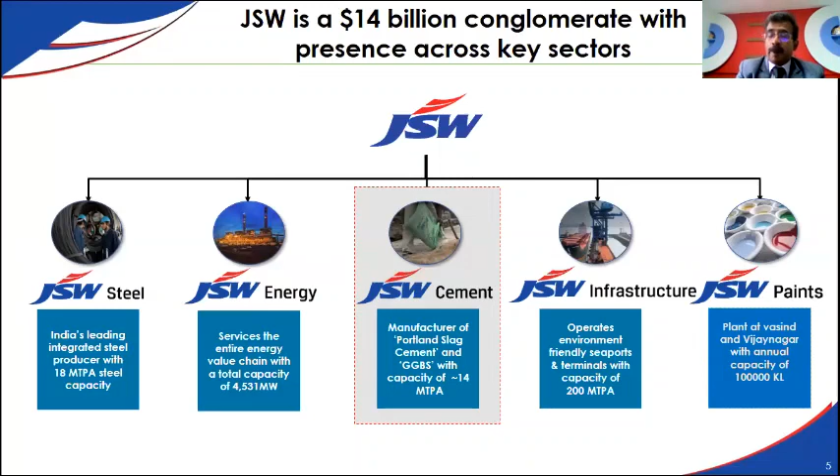So the journey started way back, but officially the company started in 2009, and we have already grown up to 14 million tons, one of the fastest growing cement companies in India. Every year there are expansions and additions. By 2022, they want to become 20 million tons. After that, the next 30 million tons is also under plan. And recently we started our paints division, and it's doing extremely well.

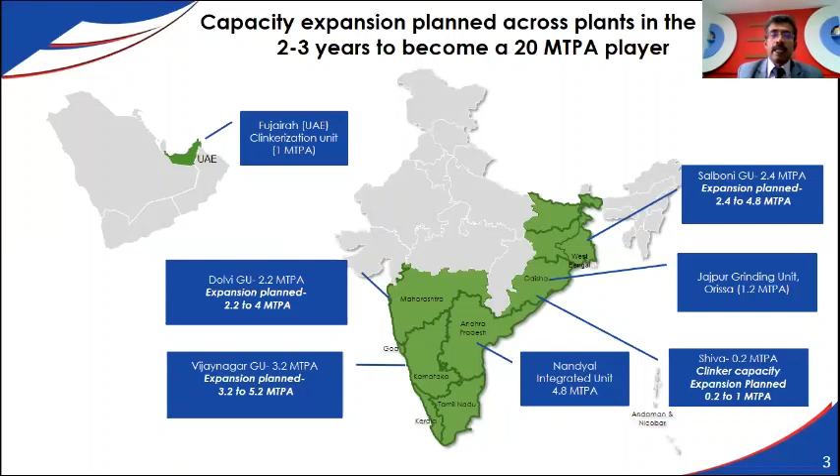This is our presence in various parts of India, and very soon we'll be launching our operations plants in Rajasthan also, that is also in the pipeline. So with that, we'll become a pan-India player. Apart from India, we are also in Fujairah, a clinkerization unit manufacturing clinker of 1 million tons. So various products we have, all are green products, except one, OPC cement, where we want to cater to the infrastructure segment.

Wherever our products like GGBS are going, in order to supplement the customer requirement, because they demand you should give OPC also, in a small way we are selling OPC. The rest of our products are all green products with Green Pro certification, like slag cement, Comp Cem, Concreel HD, GGBS for the RMC segment. Then we have slag sand, recently started.

The journey started about 4 years back, but now we are marketing this slag sand aggressively in all the markets of South and Western India. This is a product which has futuristic value and also a lot of sustainable coefficient as a product.

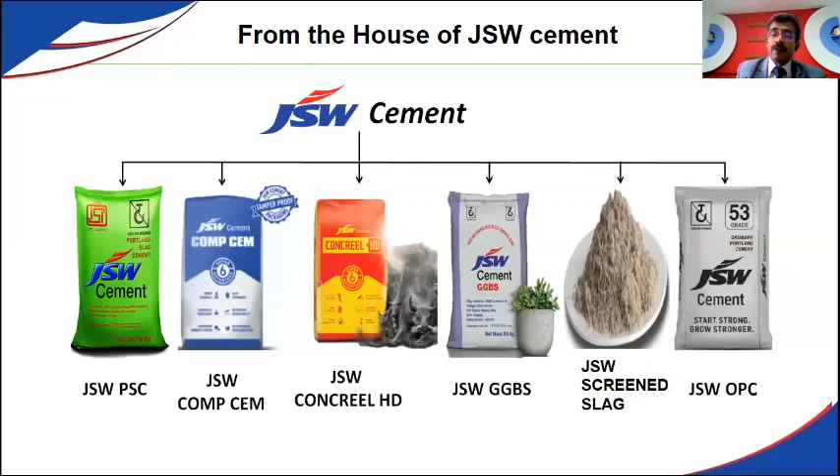So from the house of JSW, screened slag sand. It is a manufactured product. Earlier we used to use natural river sand as fine aggregate from age-old centuries. The moment the river started depleting, and the flow of water in the river started coming down, and groundwater table started receding because of the exploitation of river sand from the river basins...

...all the governments started banning usage of river sand for construction. Sand constitutes about 16 to 20% of the concrete mix. Without sand we cannot make concrete. So how to now find sand availability? River sand has been banned.

Then JSW entered the picture, and we worked on our products, slag available at our steel mills, and how we can convert it into a valuable product called slag sand, which has already been accepted by IS 383 as a manufactured sand. So the background is that there's massive infrastructure growth over the next 10 years, huge outlay in the infrastructure segment, roads, bridges, tunnels, metro lines are getting constructed in all the major metros. Apart from Bharatmala, Sagarmala projects are there, National Highway projects are there.

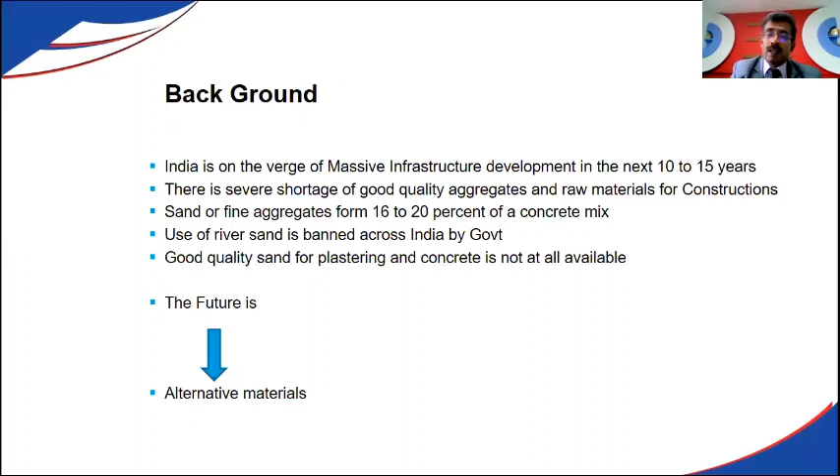One day there will be a ban on cutting the rocks also, because you are finally destroying the ecosystems. So we have to look at other alternative materials available in India. Those are from the industry byproducts.

100%, you may have aggregates, you may have water available and chemical admixtures available. Good quality cements are anyway available, we have got a lot of variety of cements available, but getting good quality fine aggregates is a big challenge in the current scenario.

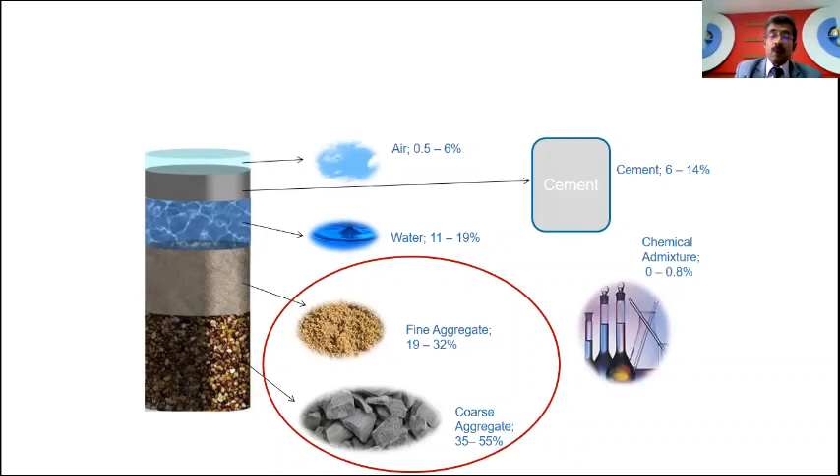Currently, there are more than 7,000 RMC plants in India across the length and breadth of the country. These RMC plants continue to make good quality concrete, starting from M15 to M80, M100. In major metros like Mumbai, M80 and M100 grade concrete are very common because they're going for high-rise buildings, tall structures. In cities like Bangalore, M60, M70 is quite common.

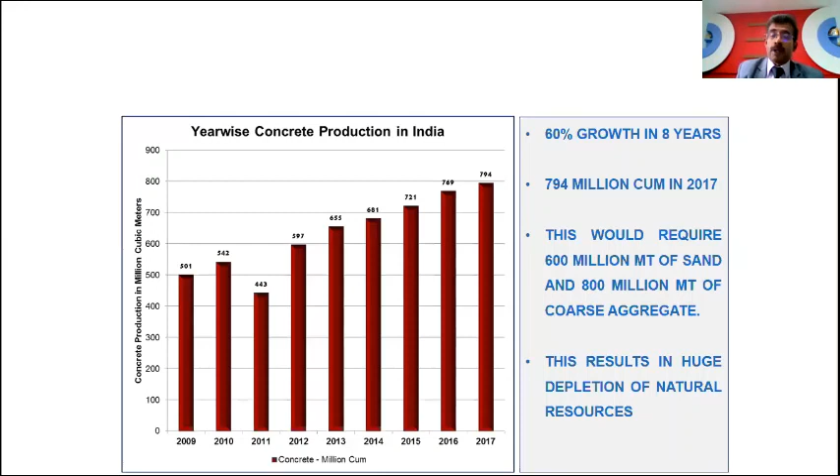As per this calculation, we're talking about 794 million cubic meters of concrete. In that aspect ratio, this would require 600 million tons of sand and 800 million tons of coarse aggregates. That's the estimate they have done for concrete production. So there's huge demand for good quality sand.

We know earlier the source was river sand. The continuous exploitation has really spoiled the river basins. Now we are talking about Rally for Rivers.

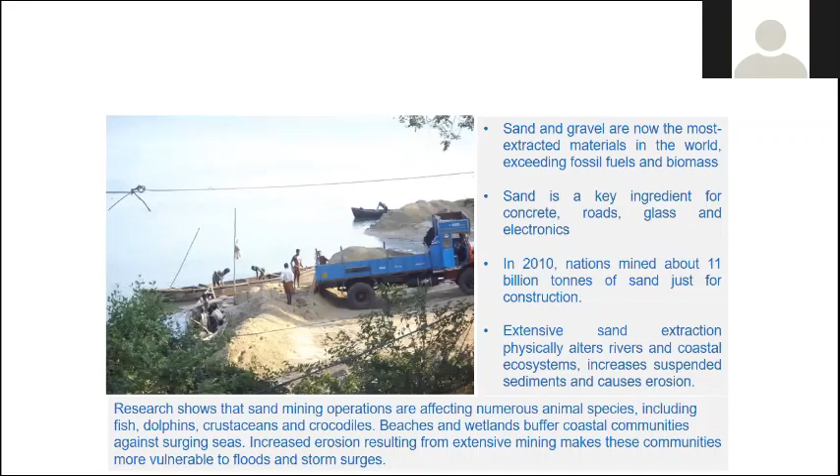To save the rivers, we want to plant on either side of the river basin a 1 kilometer green cover to improve the water level, or improve the storage level in the flow of water in the river basins. That's what we are finding with this.

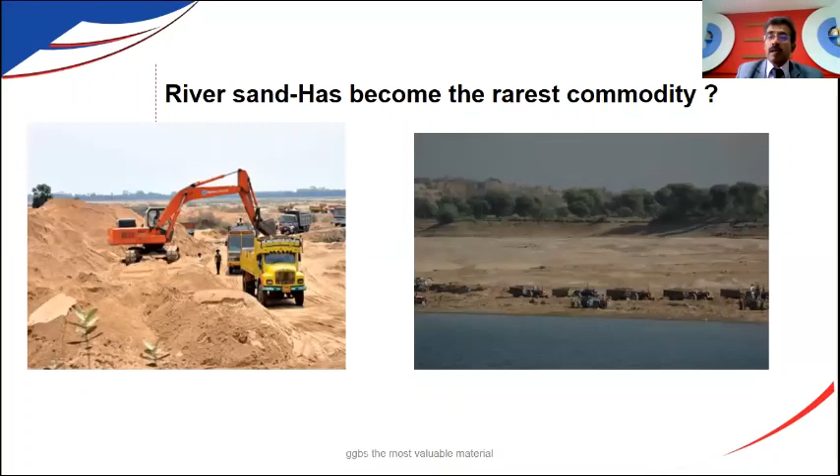We know the continuous usage of river sand across the world, not only in India, has spoiled the ecosystem, and we are getting the river basins sinking. There are so many local issues. Generally, the sand mining is controlled by the mafia or other systems, which is not revenue generating to the government also.

Anybody could go and take out river sand. Now there are some controls put in place for sand mining. But otherwise, everybody near the river basin used to take out the sand and start marketing the product. It's an uncontrolled product, and quality is not assured.

When I was working on site, I used to find filter sand. People used to excavate agricultural land where the percentage of sand is there, and then extract the sand by screening, and sell it. It's called filter sand, it was very popular. So thousands of acres of agricultural land were made barren by this filter sand activity.

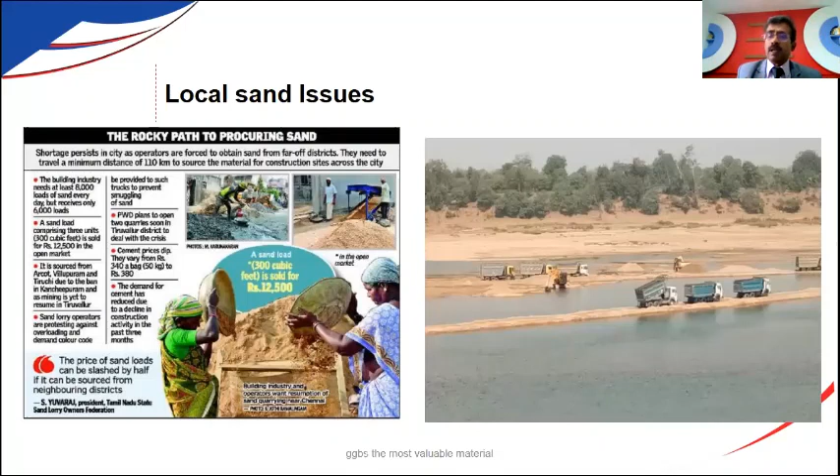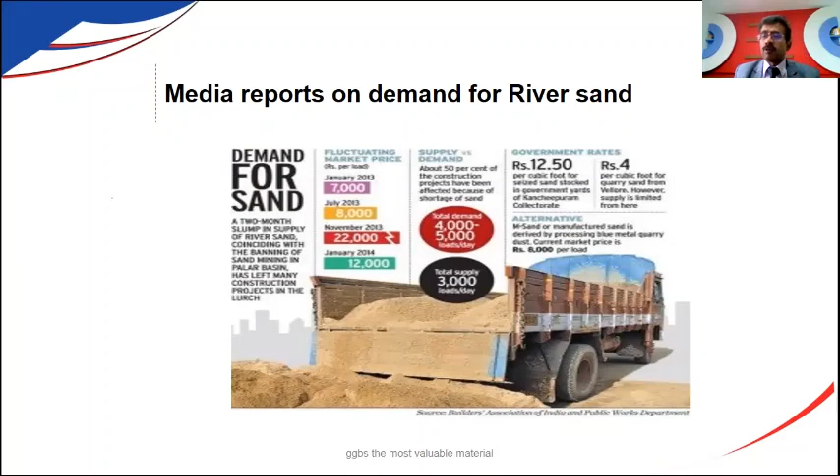You used to see media reports about this, which is not coming now, because the river sand is almost 80% replaced by manufactured sand. Due to strict regulation by the government, we are not finding much river sand coming to the cities. Maybe in rural areas, wherever the river basin is there, or there's a flow of water in the valley, they get sand.

Also, when you want to manufacture M sand, you need to keep taking out the mountains. The mountains are beauties; they create landscape for the nation, and ecosystems are there. So when you continuously do blasting and mining, there is no end to it. We keep spoiling the environment, and construction is not going to stop. It's a continuous business, as we want to provide shelter, infrastructure, roads, highways, bridges for everybody. They demolish old buildings and construct new ones. So continuously, the Mother Earth is getting spoiled.

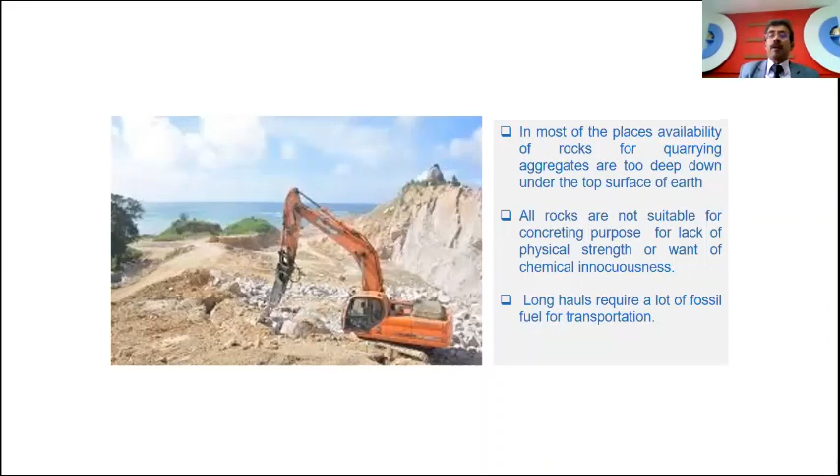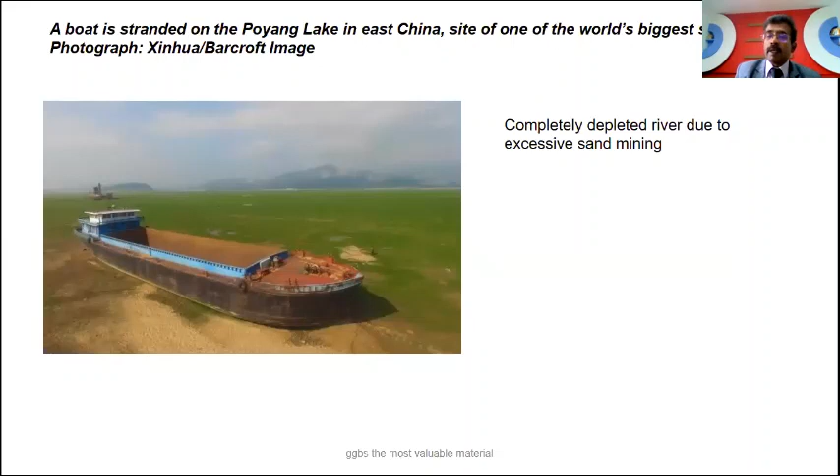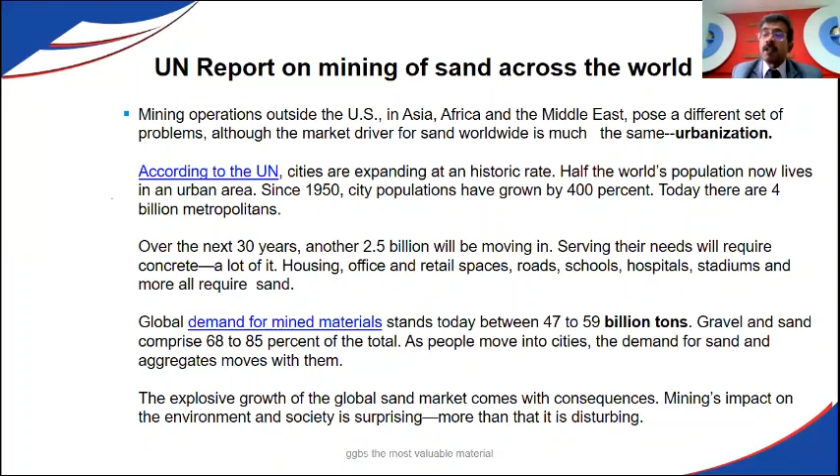There's a UN report across the world on how mining operations have spoiled the ecosystems. They say there's a continuous demand for mined materials, talking about 59 billion tons of material required. Currently, cement production is about 3.5 billion tons, and concrete production about 12 billion tons. They say by 2050, cement production is likely to go to 9 billion tons, and similarly concrete production will become 20 billion tons. So 20 billion tons of concrete, multiplied by 4, means 80 billion tons of aggregates are required. That is the requirement which is coming.

As I told you, recently Jaggi Vasudev, Sadhguru, started the Rally for Rivers to increase the flow of water in the river basin, the Kaveri basin, and he mobilized a lot of funding. I think the project is on, and they're trying to plant trees one kilometer on either side of the river bank. So like we spoil, we also want to rejuvenate. That is what is happening actually.

The cycle is reversing. Earlier, the river was flowing normally with vegetation and tree cover on both sides of the river bank. Then we started doing more agriculture, then started exploiting the river basin for sand and other things. Then the river flow came down, and now we want to rejuvenate. This river cycle is happening.

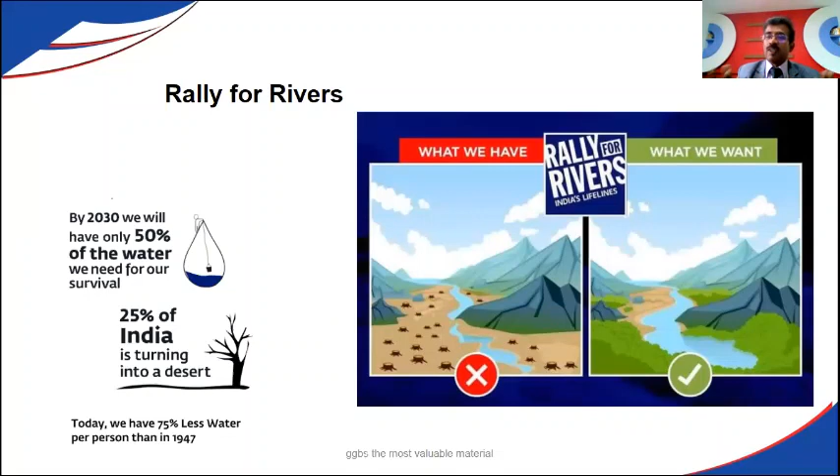River sand is nowhere comparable, because river sand comes from the continuous erosion of particles from the sand strata—millions of years of continuous erosion and gradation. That's why the particles are very round in shape, because they come along with the continuous flow of water, which also shapes the particles. So nature itself makes very good sand.

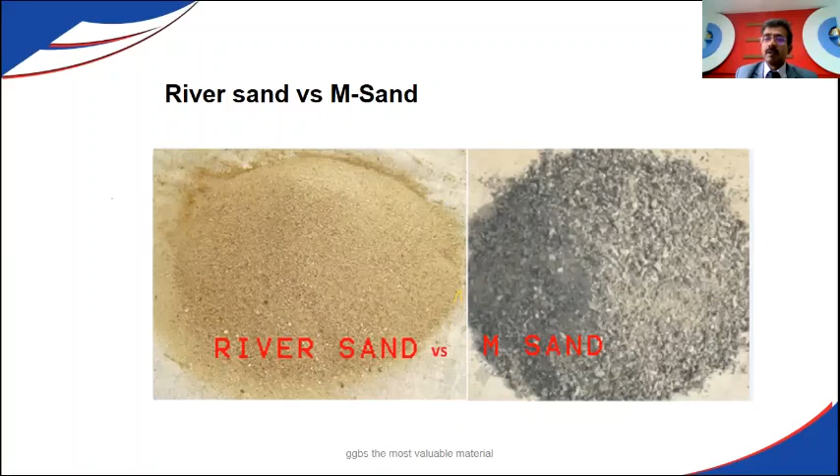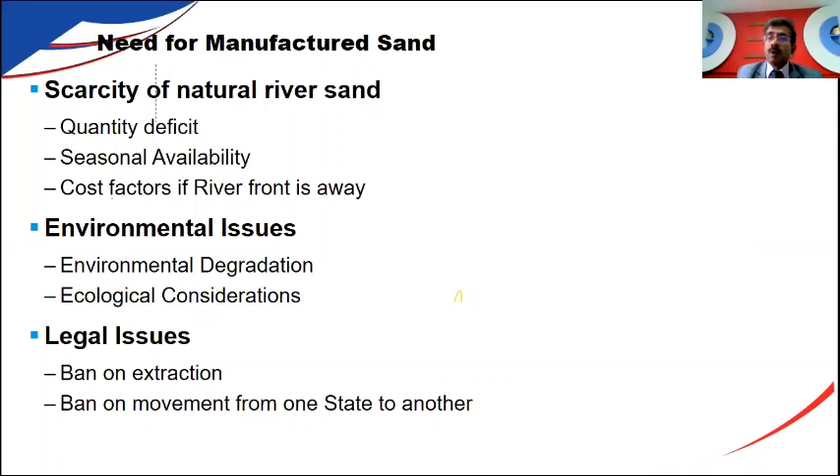So the need for manufactured sand, as I've already told you, is due to continuous demand, and also issues with environmental degradation, ecological considerations, and legal issues. You cannot extract sand from the river basins. So the other alternative is to go with alternative aggregates.

Karnataka government, way back when I think D.V. Sadananda Gowda was the chief minister—I'm talking about 10 years back, I don't remember the exact date—I still remember the announcement came. I had cut out the article and shared it with my bosses at that time at RMC India. This article was based on a study on M sand manufactured in Bangalore by the Indian Institute of Science. Dr. Venkatarama Reddy sir carried out the research work on sand and found that M sand can qualify as a replacement for river sand.

After that, the government came with a circular and a law that instead of river sand, you can use M sand for all construction activities. Then the journey started. There was a lot of resistance initially, but they started banning the arrival of river sand, and after that there was no other alternative. People have migrated—now if you ask what is sand, nobody knows what river sand is, in a city like Bangalore. Still, in North Karnataka markets and other markets wherever sand is available, people are using river sand.

Also, the government of Karnataka during Siddaramaiah's tenure wanted to import sand from Malaysia and other countries, bag it and sell it under the MSIL brand. That also they did. Later on, they have not continued it, maybe because people had adapted to M sand.

Whenever we talk about sand, we always refer to the Indian code IS 383:2016. Earlier the code said you should use natural sand, but the latest code says that manufactured sand can be utilized from process industry byproducts. That's the modification the code has come out with. So now people are manufacturing M sand, slag sand, copper slag sand, fly ash based sand, and pond ash based sand—using various byproducts of the process industry to manufacture sand.

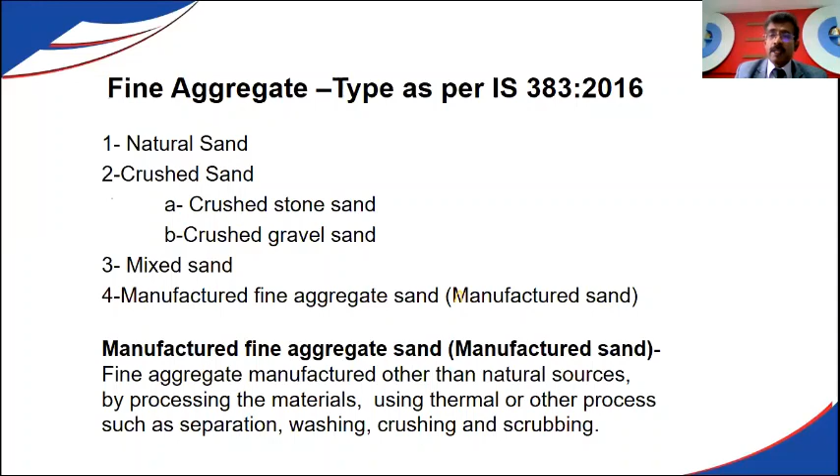So manufactured aggregates can come from any source, but JSW being predominantly a steel manufacturing company, we have got various types of aggregates being manufactured using our slag. We have two types of slag: one is the blast furnace slag, second is the steel slag. So iron slag aggregate, steel slag aggregate, copper slag aggregates, recycled aggregate. These are the aggregates we can get from the manufacturing industry.

Recycled aggregates are where we demolish the buildings, take it to a processing unit and take out the aggregates, coarse aggregates as well as fine aggregates. That is becoming very popular now, and that is the future, because as we develop infrastructure in the cities, many more small buildings will be demolished and we go for high-rise buildings. So what will you do with that debris?

So those debris are taken to a processing plant, C&D processing units, and they crush it and get various shapes of aggregates. And the codes are permitting the usage of these aggregates, both as coarse aggregate as well as fine aggregate.

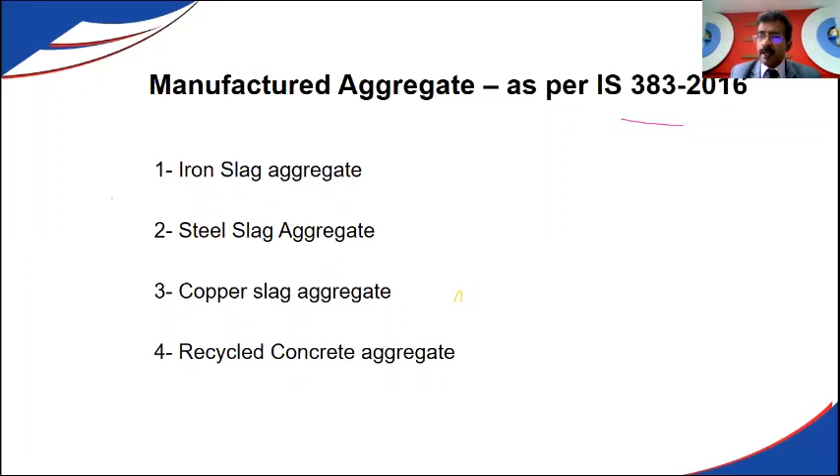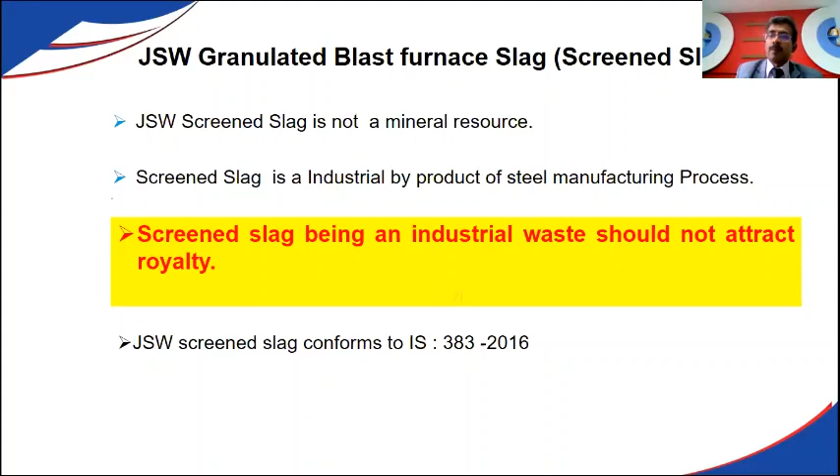So JSW granulated blast furnace slag. We are having slag being manufactured at our Thorangallu plant. Slag is not a mineral resource, it's an industrial byproduct. So this product was not suiting the IS 383 2016 requirement. It was having angular shape, proper gradation was not coming, density was less. So all those things were there.

Why we introduced this product? Through various research work. Engineer Satish Dabbiru from the steel industry is the man behind all this research work from the steel laboratory, our JSW Steel R&D Center in Thorangallu. He has done a lot of work along with his team to convert this product into a very eco-friendly, usable product through modification of the product.

We wanted to really curb the shortage in the market of river sand. We know the problems with river sand are many: silt is there, then you have got clay lumps, lignite particles and all these things. So you have to really screen that product; directly you cannot use river sand. You've got river pebbles, then a lot of plastic material will also be there, whatever goes into the river basin. We know very well it is not a clean product. We have to take it out and properly screen it.

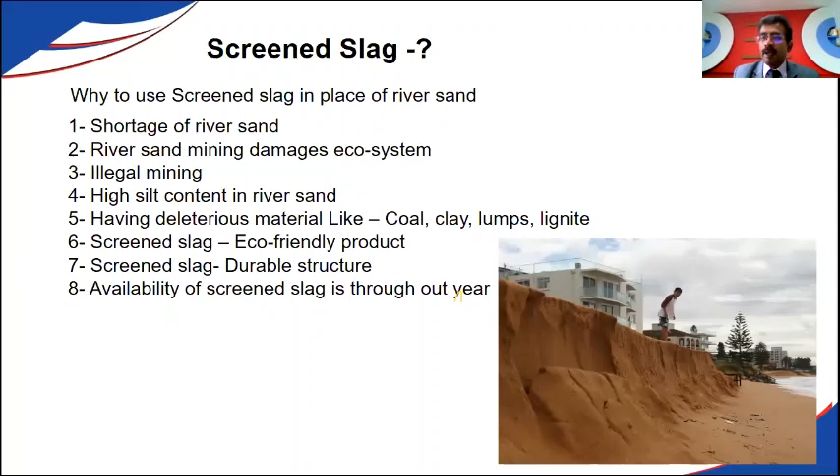We'll get about 10 to 15% wastage, based on the source of the material. And you have to pay for the full truckload, so you are paying for the wastage also when you use river sand.

So as an alternative material, slag sand will reduce the burden on the environment. It's extensively investigated; thorough research work has been done and properties have been modified. I will showcase how we have changed it from a product which was not performing to a performing product. With studies at the Indian Institute of Science and NCCBM, we conducted almost 2 years of research work, giving the samples to them, because we need the certification from them that the product can be used in concrete and plastering applications.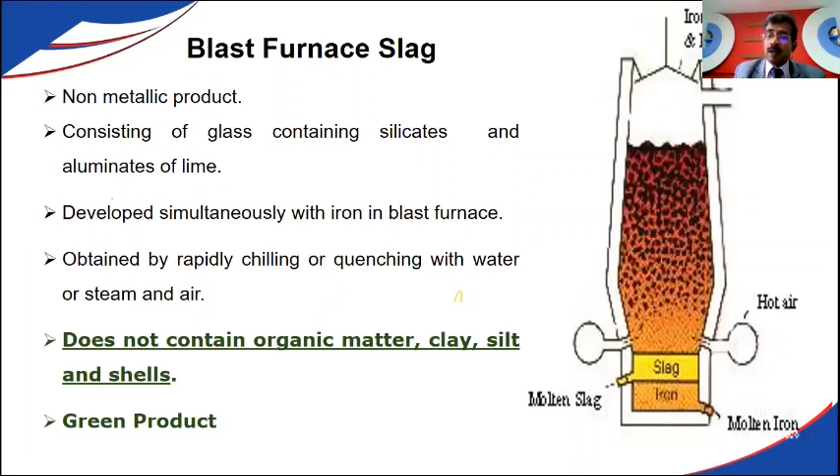The same product we take out for manufacturing GGBS as well as slag cement and other products. And we have huge capacity to manufacture the slag, and the balance slag we take out to make slag sand.

That's how the slag generation happens. The fluxes, iron ore and coke will be fed into the raw mill for iron making in the blast furnace. Then we take out the pig iron to process for steel manufacturing. Then we get the slag removed, and that byproduct will be used for making our slag sand.

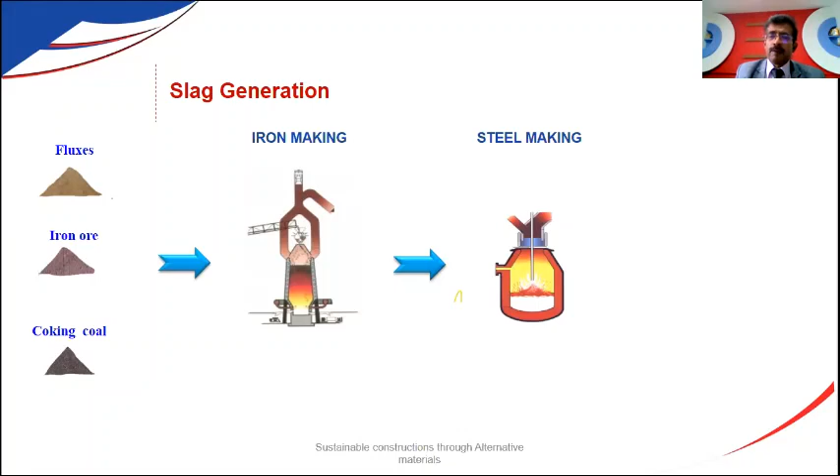And also in steel making we generate steel slag at about 250 kg per 1 ton of steel. That also we are processing and converting to a valuable product, fine aggregates as well as coarse aggregates. This is how we arrive at the product.

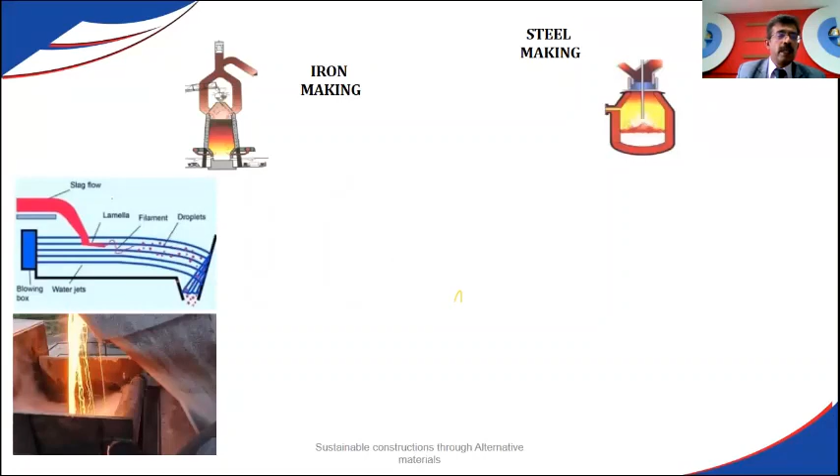So the quenching process starts the moment slag starts flowing. We have water jets that convert it into droplets continuously, and we get high quality granulated blast furnace slag, which can be used for fine aggregate. Also, from the steel mill, we do the air cooling of the LD slag. Then we get coarse aggregates.

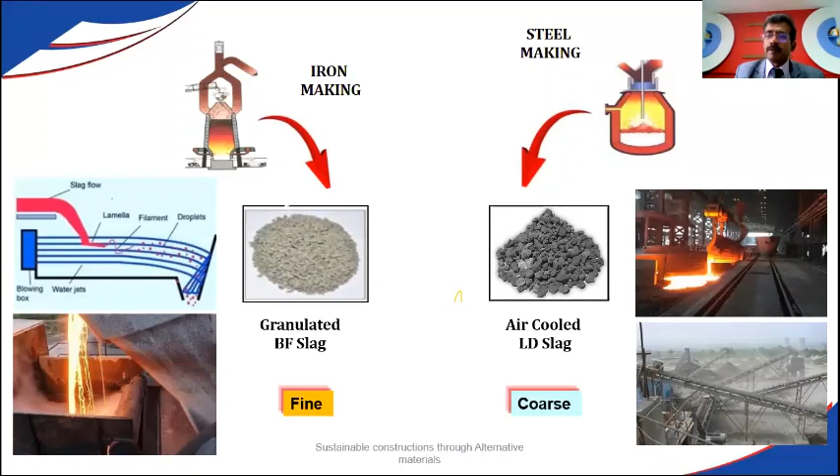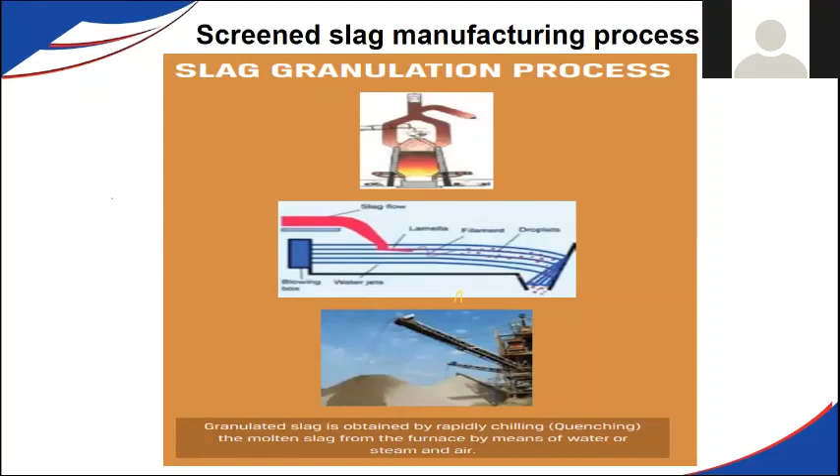So, a process industry, where earlier the products were being dumped in the landfill, now they have become the most valuable product. As the days go, this product will be in great demand. The slag granulation process I have already explained. So once the granulated slag is removed, we put it into the crushers to shape the particles to the desired property to get the zone 2 specified manufactured sand.

There are so many steel mills throughout the country. Currently the steel production in India is about 130 million tons. So imagine 130 million tons. We get close to 35-40 million tons of slag. Most of it is used for cement manufacturing and GGBS manufacturing. The balance left over can be converted into sand, which can be further utilized for concrete making.

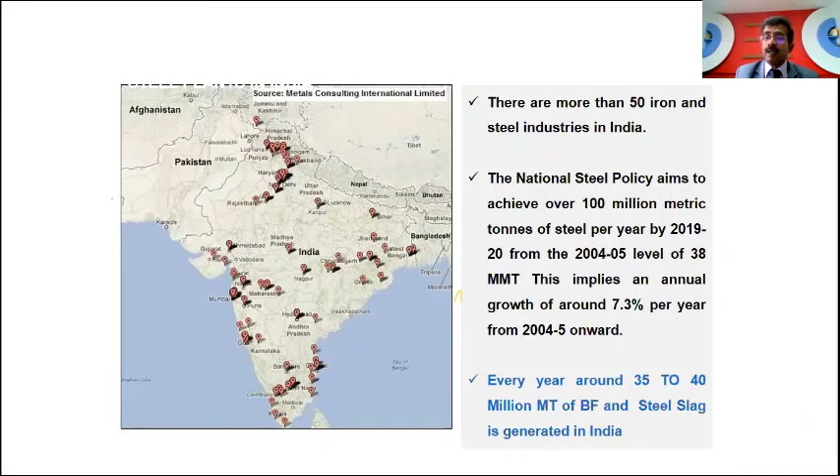So by processing it, we have converted it into a very valuable product which is being utilized now. Close to 1 lakh ton we are selling now. Very soon we are going to be at 2 lakh ton per month. So demand is increasing every day, and the popularity of the sand is increasing. Continuously we want to educate the customers on this.

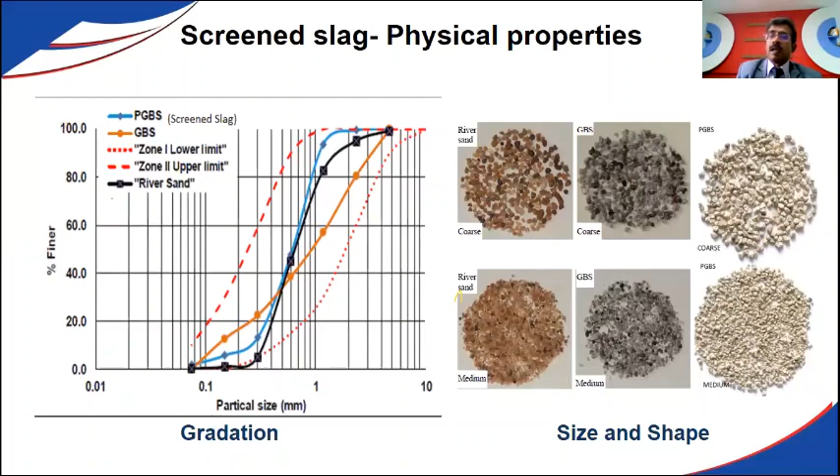So friends, I was talking about how the changing gradation has really changed the product. We have to take river sand as a reference product because it has been used for centuries. The density of river sand ranges from 1400 to 1700 kg per meter cube, based on the river basin and the gradation of the river sand. The specific gravity is 2.6 to 2.8. Water absorption is 1 to 3%.

When we used raw blast furnace slag, the gradation was not up to the mark. It was in zone 1 specification, not zone 2. The density was less, between 1100 to 1200 kg per meter cube. Specific gravity was also a little less, and water absorption was more. When we changed the product, you can see how we improved the density, and the specific gravity and water absorption levels have been corrected. So it matches the river sand specification.

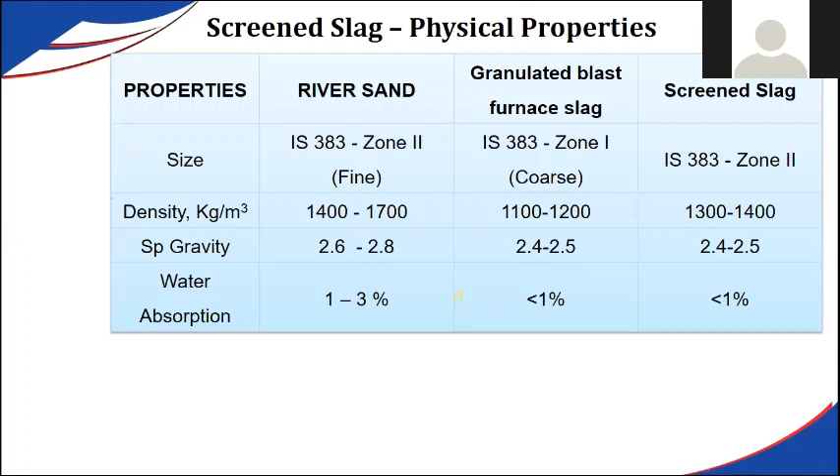So after manufacturing the product, we gave it to NCCBM and also the Indian Institute of Science for study, because they are the top research institutes in the country, to analyze the performance of the product for both mortar and concrete applications.

So, advantages over river sand. Not only does it meet the river sand specification in the physical parameters, it has uniformly sized particles. There are no marine products, shells, shale; these impurities are not there in the screened slag. It's a pure product. Then clay and silt, 5 to 20%. River sand has all types of organic and inorganic material, and oversized particles are there. In this product, what we are marketing as screened slag sand, you don't find any of these things.

Straight away, you are saving 20%. Let us say 2,400 rupees is the per ton river sand cost. Let us say 20% of it is impurities. You are paying for the waste also, no? Okay. 20-25%. So straight away, for every 1,000 rupees, you are saving 200-250 rupees by using this product, because the wastage is not there.

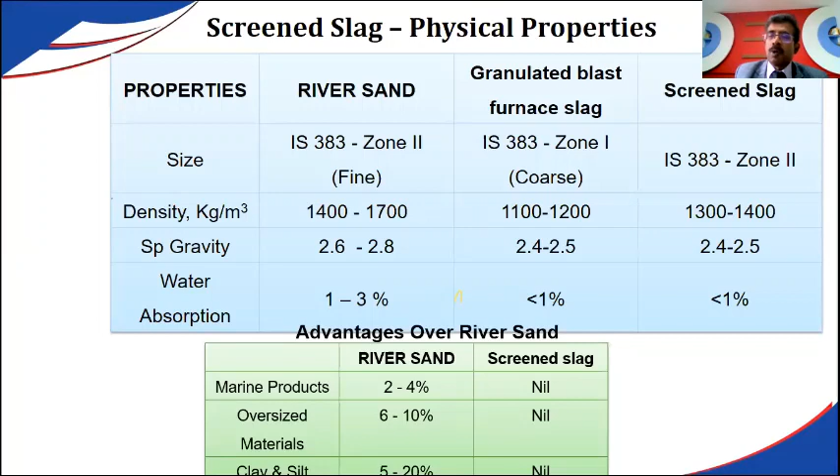The moment people say river sand, they say okay, I'm ready to pay any amount, no problem. But you are paying for the waste also when you buy that product. And also the moisture content variation is always there. During the rainy season, bulking of sand occurs, you don't get the exact weight. So the cheating will happen when you buy river sand. When you buy the slag sand, there's no problem. It's properly weighed, from one of the largest conglomerates, the JSW group. You get all the benefits and you get a proper invoice, billing, everything.

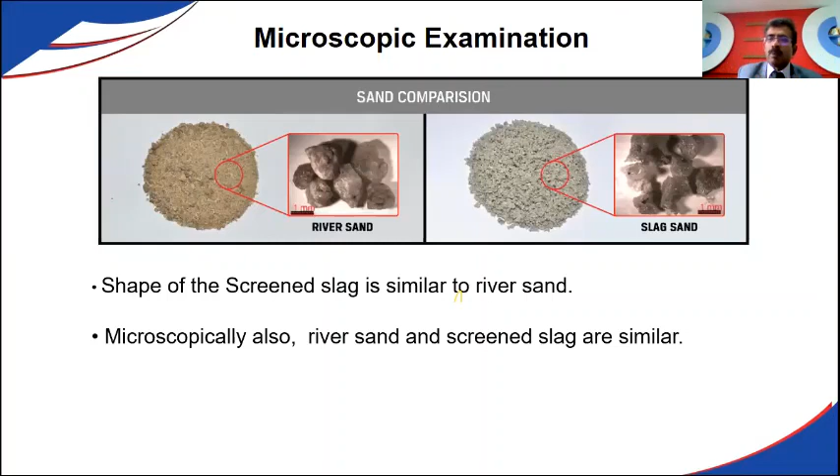This is the comparison we did between river sand and slag sand; it is typically matching, microscopically also we have matched. We have gone to the minute level to analyze the product, whether it is working or not. After that, we did 25% replacement. People say no, the building may fall, we don't know, we don't trust it. All that they will say. So we did 25%, and later on we did 50% replacement, 75%.

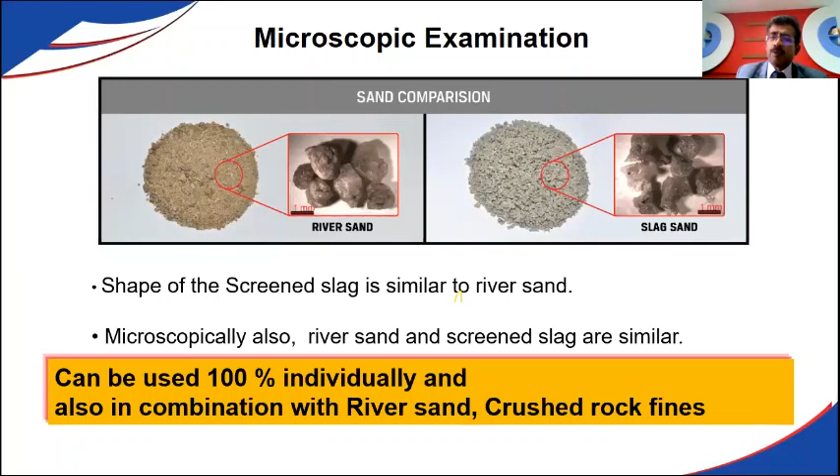Then we did 100%. Also, we did it in our own steel factory, many buildings, many heavy duty flooring applications, to study. Because first you want to test, like any vaccine. Now Corona is there, people are testing vaccines. So it was applied on ourselves only. We used our own product to build huge infrastructure projects inside our campus, and they have been working for the last 10 years. There is no problem at all. So that is testimony that it can withstand heavy loads, heavy duty flooring, and also weathering conditions.

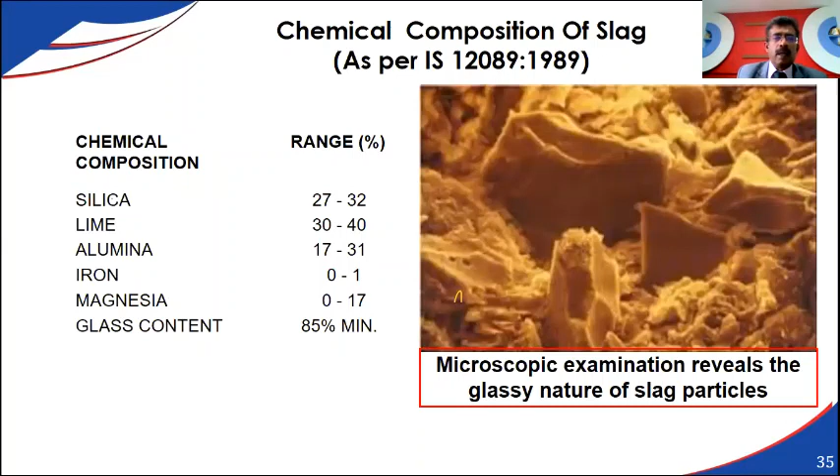Also the glass content, everything is there as per the requirement. It has chemical properties like this. So the properties of concrete with slag sand: you may ask, friends, whether the property is good or bad, whether we are going to get inferior concrete. That worry is always there.

Earlier I was in RMC India as a sales manager, so I used to promote fly ash. At that time, fly ash was available. People said, hey, somebody is putting budi in the concrete. Earlier people used 100% pure OPC cement. So when we recommended fly ash, people said they're using ash, concrete will fail. Everybody had that mindset. Then gradually we educated, showed the results, gave presentations, and people started believing. Then GGBS came. People said, why should we use GGBS? We cannot keep on experimenting.

Today, we are selling close to 1 lakh ton in the Karnataka market. If OPC is selling, let us say, 3 lakh tons in bulk, GGBS is selling 1 lakh ton, almost 25 to 30% of the OPC. So for any product adoption, people will take time, engineers will take time, because they have to experiment and experience the product. Then only they will accept it. Or they should have a reference point: somebody has used it, nothing has happened. Then they will use it.

Using slag sand, we are going to get a very good workable concrete, a very cohesive mix, no segregation and bleeding, because of the uniform particle size and round shaped particles. Whenever it is uniform, the transition zone also becomes narrow, so cracks will not be there. The interfacial zone, the bonding of the cement or GGBS particles with the fine aggregate, is very good, because with round shapes we have lesser voids. That ball bearing effect will be there. In cement mortar for plastering applications also, rebound losses are minimized and you get improved compressive strength.

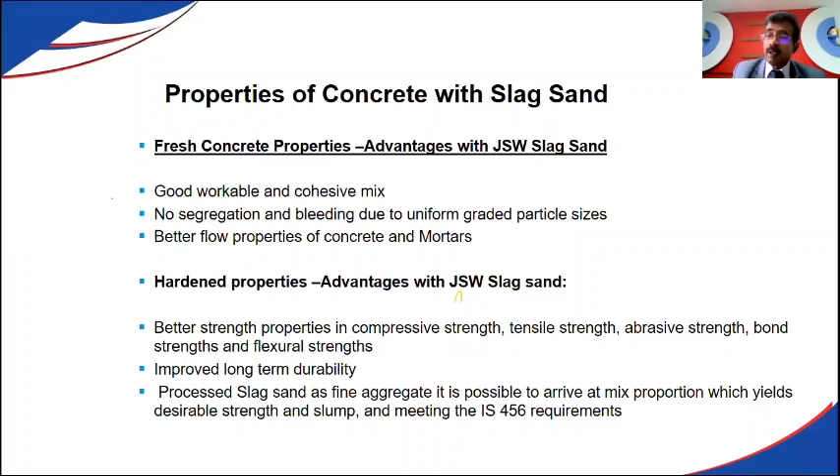With processed slag sand as a fine aggregate, it is possible to arrive at mix proportions based on your own trials. There should not be any problem at all. I have already explained much of the importance of the product. It is very good in both the physical and chemical properties of the concrete, and we can completely replace it. It's a very eco-friendly product.

River sand is not eco-friendly. Even M sand is not eco-friendly. The reason behind it: you are crushing the mountains. One day, after 10 years, mountain after mountain, environmentalists will go and stage a dharna: don't break the mountains. You keep on breaking mountains. You may go to Nandi Hills. Let us start breaking the Nandi Hills. Is it possible? Not possible. So there's a limit for everything.

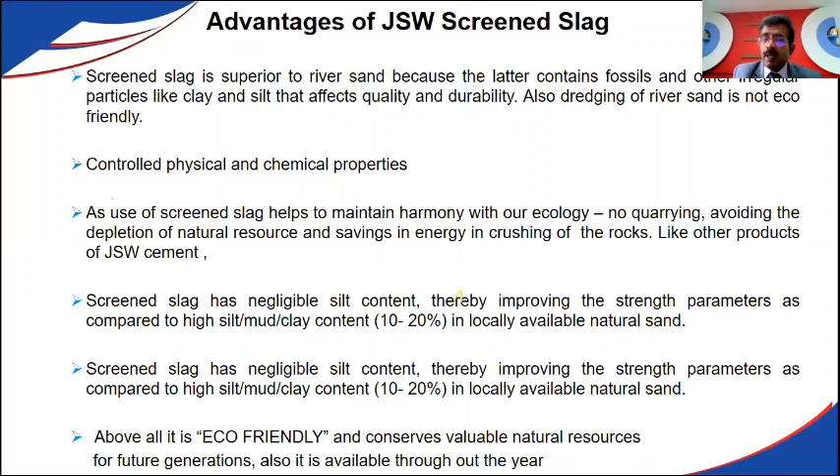But using recyclable, sustainable products with life cycle cost, meeting the current demand and also addressing the future demand. These are sustainable products where continuous steel production is going to happen. Currently it is 130 million tons, and by 2030 they're talking about 152 million tons. They're talking about making up to 300 million tons of steel in India. After China, India will be the second largest producer of steel. When we make steel, we get these byproducts which can be effectively utilized to make various products, including sand.

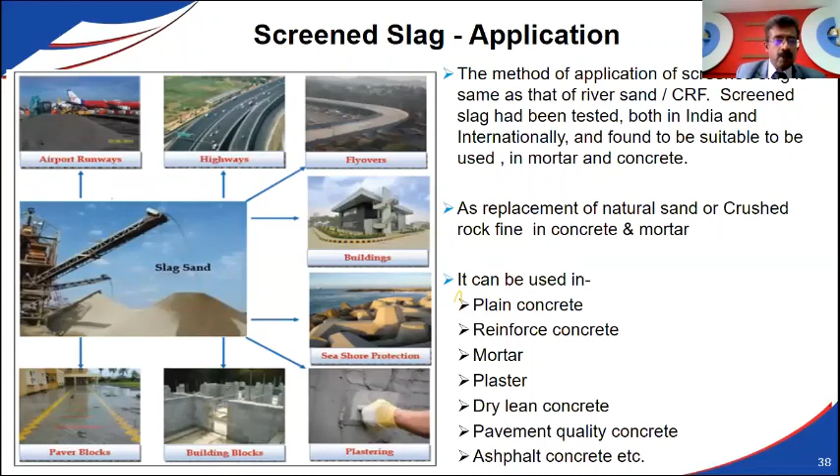So where can we use this product? We can use it wherever concrete and plaster are going. Plain concrete, reinforced concrete, mortar, ready mixed mortars, dry lean concrete. We have tested this product for various applications, and it can be used everywhere. In our own steel factory, we have used this product in various applications for many years. We have had no problem at all.

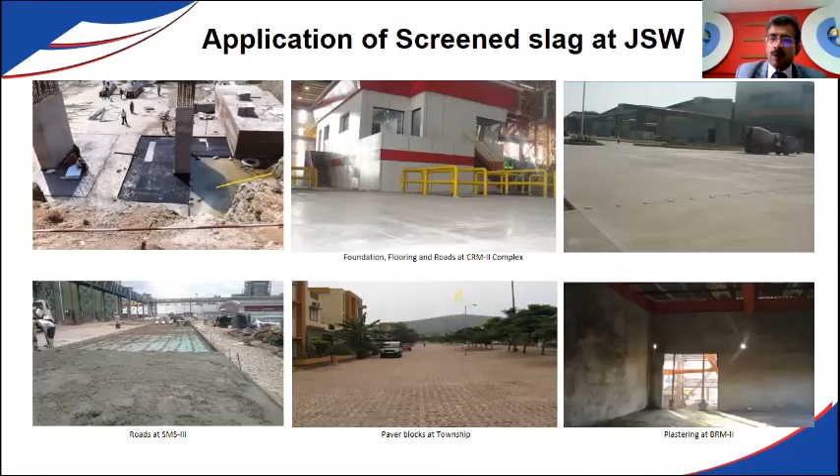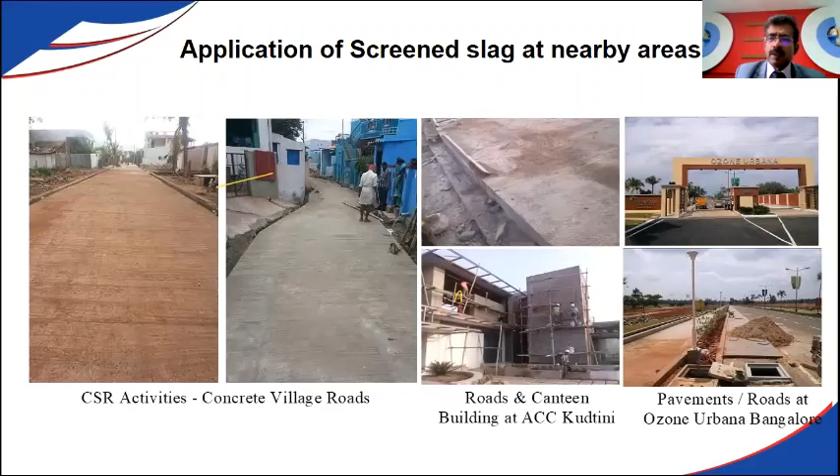Massive foundations you can see. We are using it in flooring applications, the heavy duty flooring we have done. Nothing has happened to any of the structures. Apart from that, as a CSR activity, we worked with the government, PWD, Government of Karnataka, Nirmiti Kendras and all. We did rural roads with concrete, just to give confidence to the people. And we have done plastering for government buildings. Nirmiti Kendra used it in the administrative block building in Bellary. The village roads we have done.

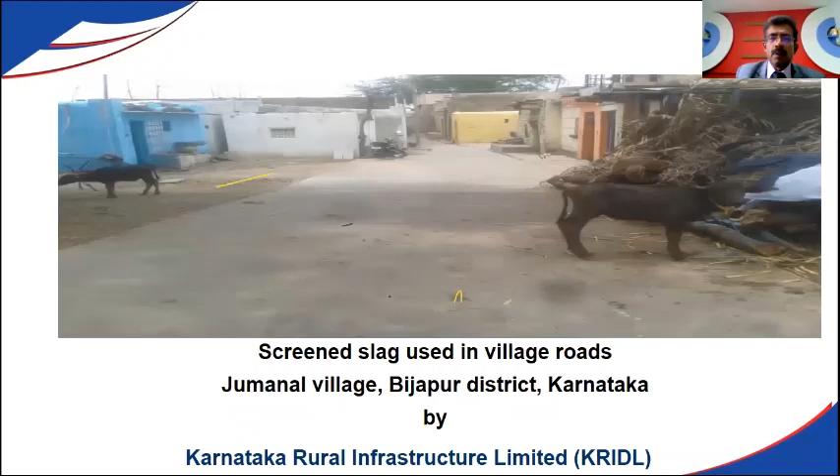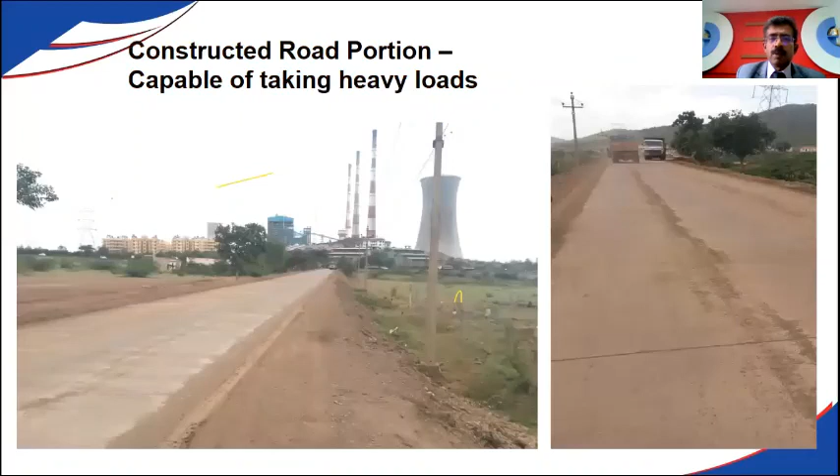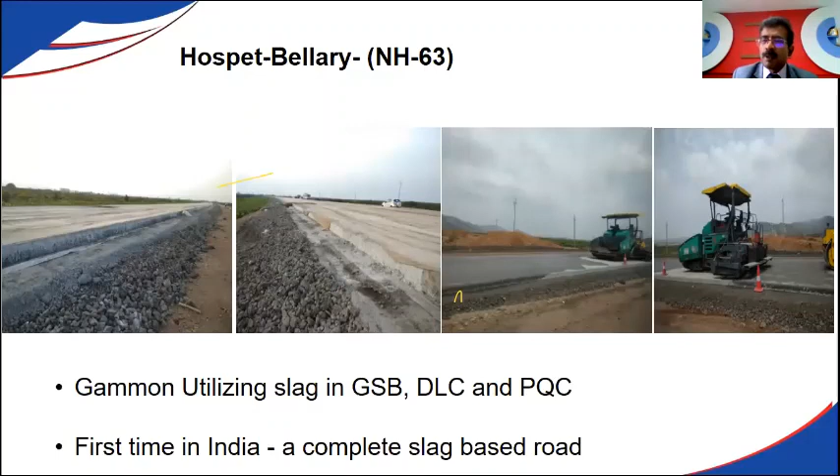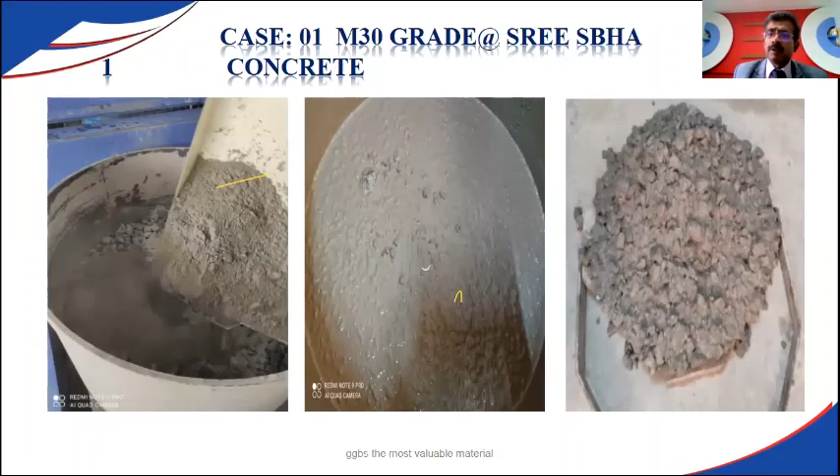In Bangalore also we have done it in various RMC plants. We want to promote it in RMC plants wherever special applications and special concretes are there. They can make use of this product. Let us say they want to design colored concrete which has to be whitish, pigmented. If you use M sand and cement purely, it will be very dark, and you have to add more pigment. Especially for decorative concrete applications, the slag sand will be very good, because it is almost like river sand.

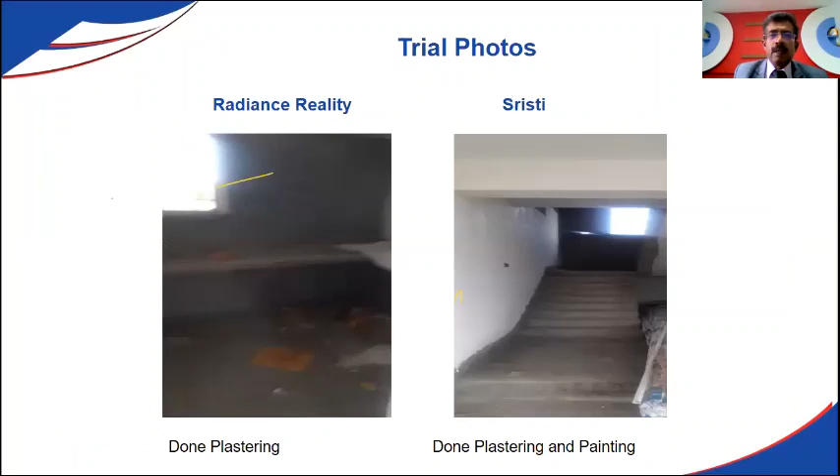Plastering we have done, Mana projects we have done. In Chennai also, we have tried it out. So this is the trial feedback: no silt content, good workability, good finish. Some people say the price is higher than M sand because the transportation costs are very high. When you are paying a very high cost for river sand, why can't you pay for the same or better quality slag sand? That's what we want to say. They can blend it also, 50-50 with M sand, to get optimized costing. That is quite possible because even IS 383 allows blending of sands to get the proper gradation.

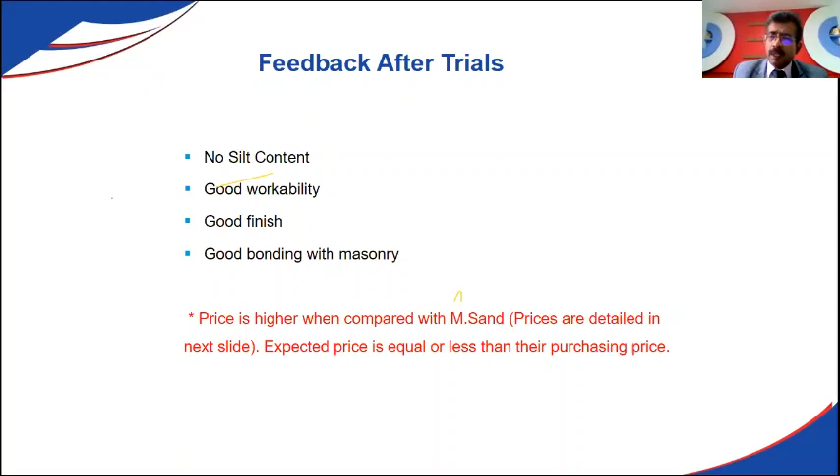IHB segment people say they are getting M sand in Bangalore at 1,200 rupees. This sand comes at 2,000 plus. So you blend it, and your average cost will come to 1,500, but you will get better quality. If you start plastering with only M sand, crushed fine rock, you may get cracks, shrinkage, so many things. So better go with blending of the sand. This is quite possible. Many people in North Karnataka are completely using this sand only. Even if you give M sand at a cheaper cost, nobody prefers it, especially for plastering applications. It's very much recommended to use slag sand.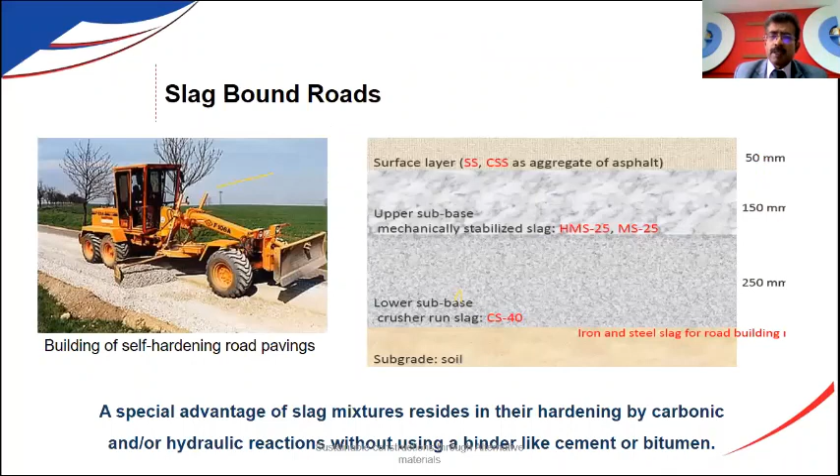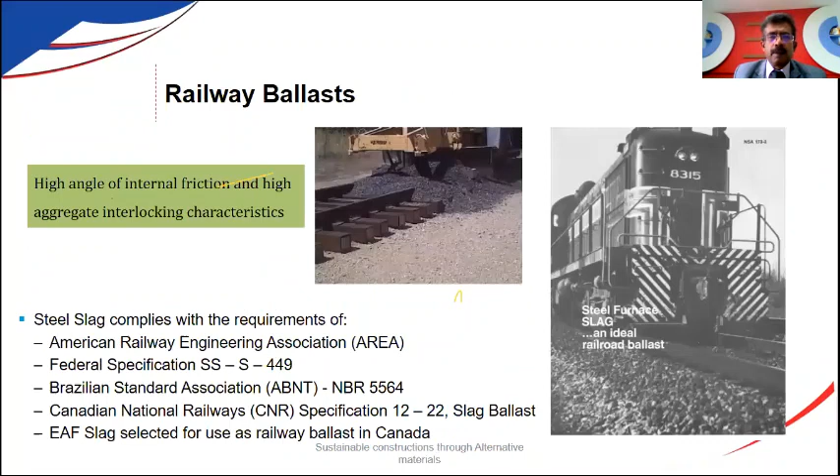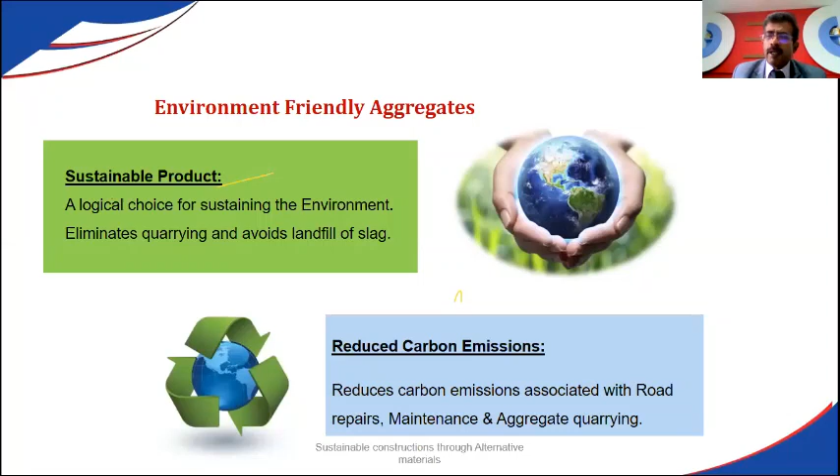So future applications, you have done on various products and specifications. These products can be used even for coastal environments also, artificial railway ballasts. It's sustainable. Not only does it bring sustainability, it reduces the carbon footprint also in terms of reduction in the cement requirement and maintenance cost. So overall, you are going to get a very eco-friendly product, and savings also you will get.

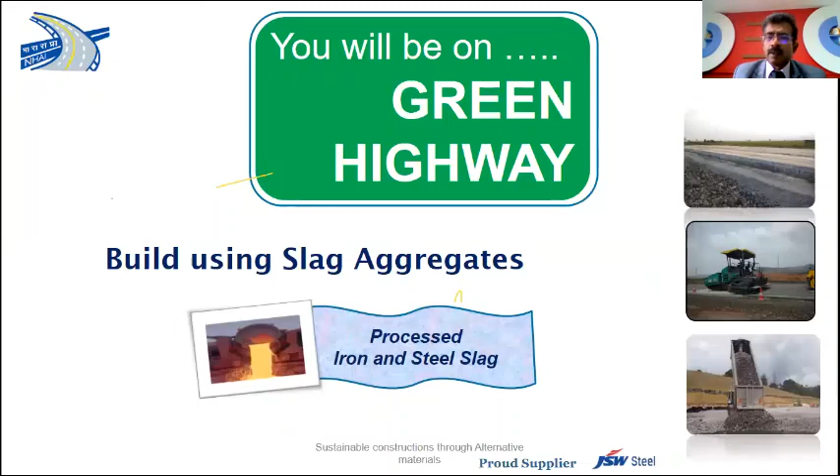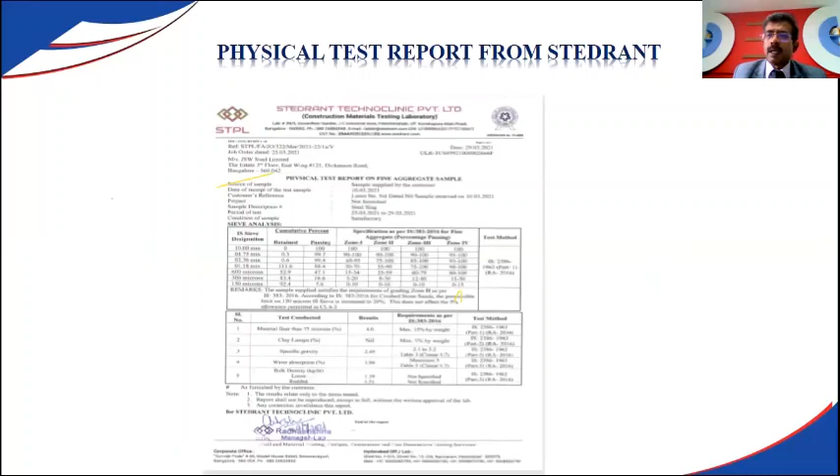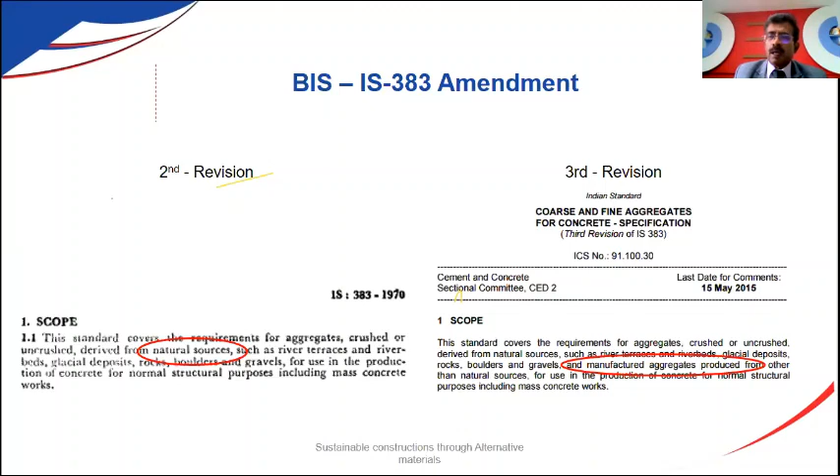Talking about building a green highway using slag aggregates, processed products from both iron and steel. And we have recently got it tested at Stedrant Laboratory also. Stedrant Laboratory is a reputed laboratory in Bangalore. They have done the gradation and accepted. And as per the codal provision, IS 383 has been amended in 2016. Instead of natural sources, you can use the fine aggregate from manufactured sources also. That is what it's saying. With that revision, even the government agencies cannot question you.

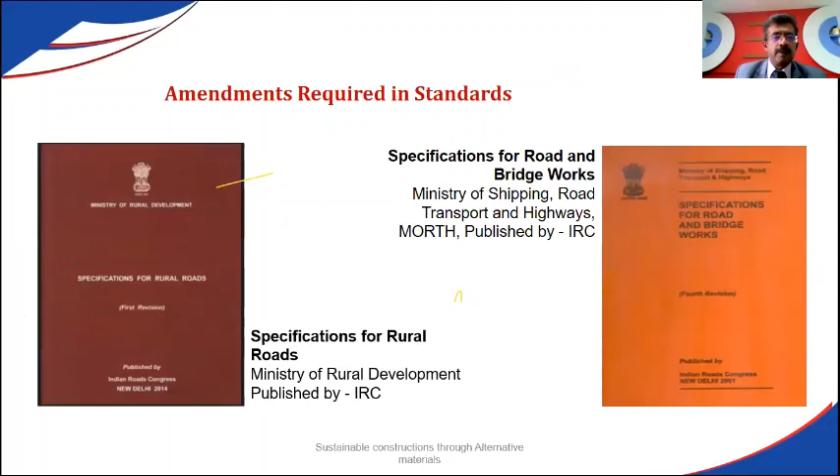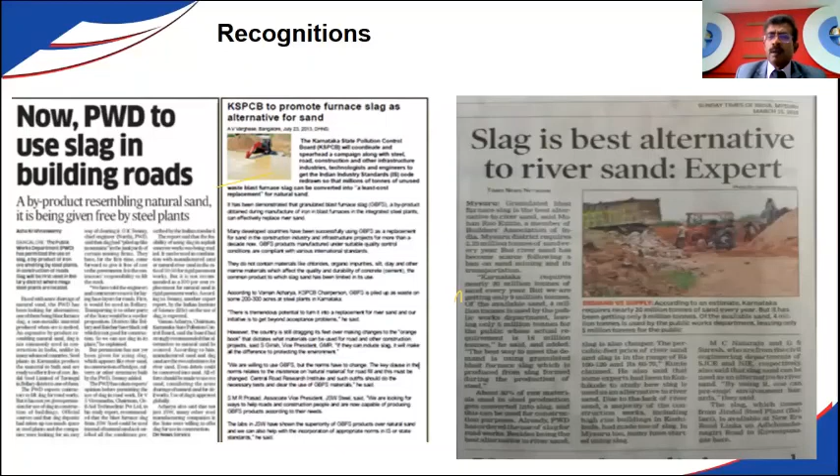And we have got approval from the Ministry of Shipping, Road Transport and Highways, MoRTH specifications. Specifications for rural roads, already it is there. And PWD has recommended the usage of slag in the building of roads in Karnataka. And also many articles have come recommending the usage of this product. Karnataka State Pollution Control Board also has recommended to use it, because earlier the slag was not being utilized. It was creating a big landfill. That is the reason they have recommended to use the slag. Not only the slag, wherever the byproducts are there, they are recommending to use them for construction applications.

So I would like to conclude my presentation today: I request all the engineers who are present today to continuously use this product. It's available. My team is there. Our team is there. Technical team is there. Marketing team is there. 99 members are there. I think it must have exceeded 100. I'm happy to see 99 participants in this presentation.

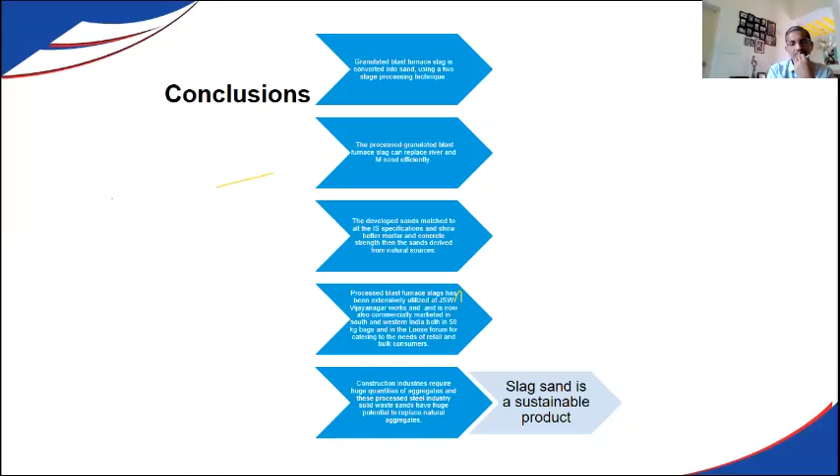And being civil engineers, contractors, building industry professionals, when we want to use this product, always keep in your mind: I want to construct my building, we should be eco-friendly. It saves natural resources for the next generation. If you keep that in mind, immediately you will start using these products. Don't always worry about cost. Cheaper products will not give you durability. If it is a bit costly because of transportation or any other logistics issue, it is worthwhile; try to use this product, get the maximum benefit out of it.